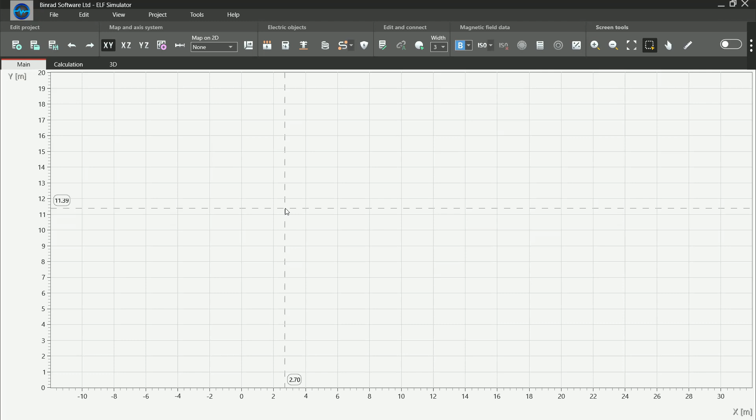To load a map, we press the Load Map button. Next, select the desired file, then OK. Usually, after a few seconds, the map is loaded.

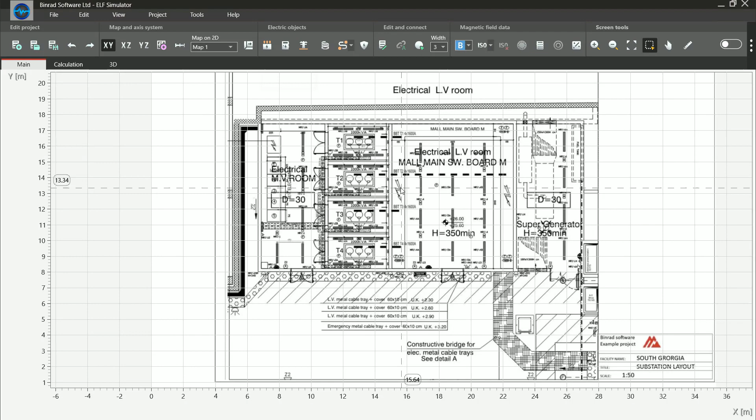As you can see, we can zoom and move it in 2 dimensions and in 3 dimensions. When zooming, you can see that the image is not that clear.

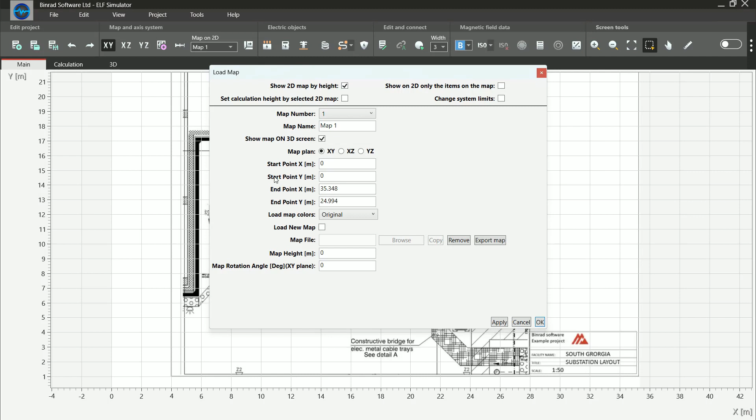To improve the appearance, we will load it again, but now with a higher DPI resolution. We select 150 for the DPI. In most cases, this will be enough. Don't use a higher DPI resolution unless it is needed, because it might slow the software down. Next, press OK.

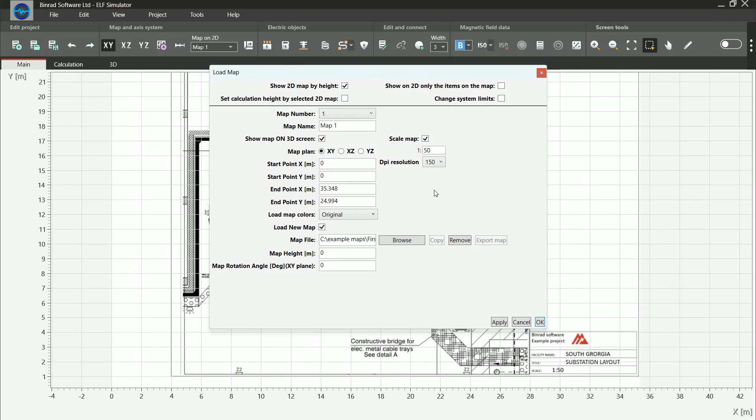Now it looks much better. Before continuing with the project, we must check that the map is calibrated. This check is done by using the software ruler to measure a segment for which the real length is known. This should be done for a vertical and horizontal segment.

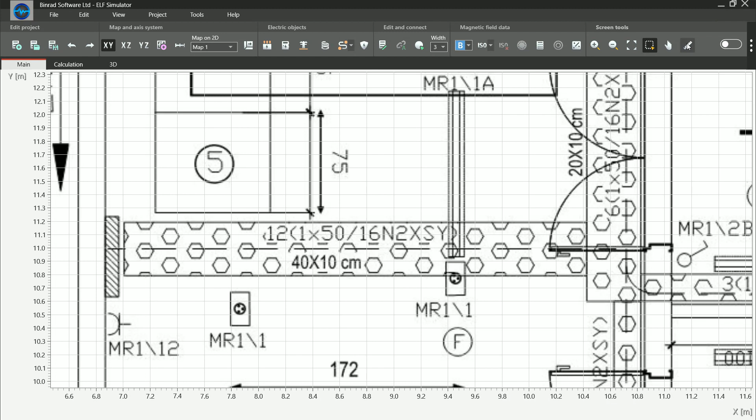We first check the vertical segment with a 75 centimeter length. The result is correct. For the second horizontal segment, the result is also fine. But this will not always be the case.

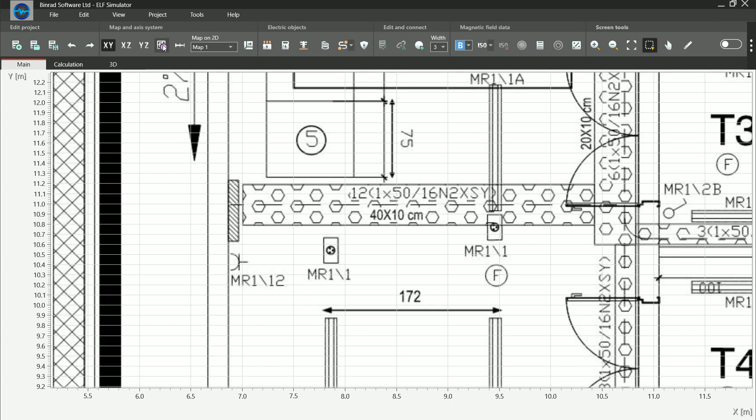To demonstrate how the calibration is done when needed, we will load the same map again, but this time with the wrong scale. We select the same file as before, but for the map scale, we choose 100 instead of 50. The DPI as before will be 150.

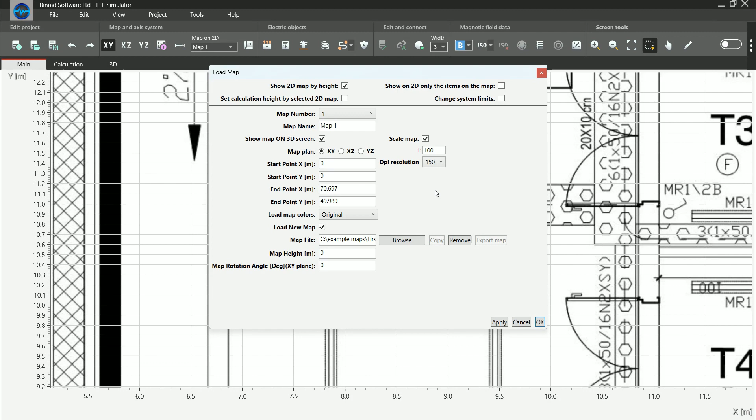As you can see, the real map scale is 1 to 50 and not 1 to 100 as we selected.

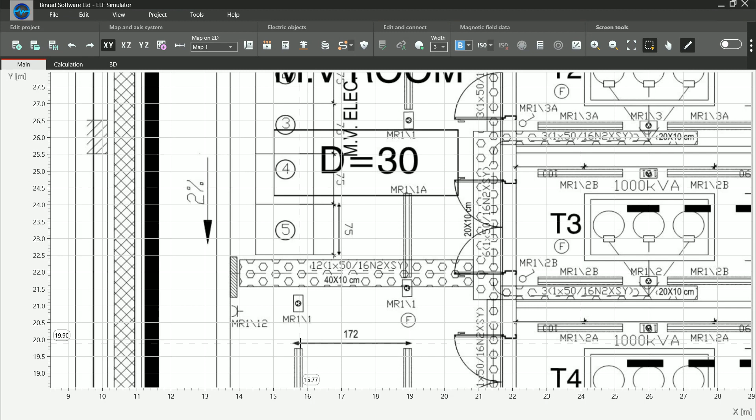We measure the 2 segments again. This time, their length is twice as long. As such, the map must be calibrated.

We press the Calibrate Map button. The default option is to calibrate by mouse. We will use this option. Now the real distance between the 2 points we are going to click should be entered.

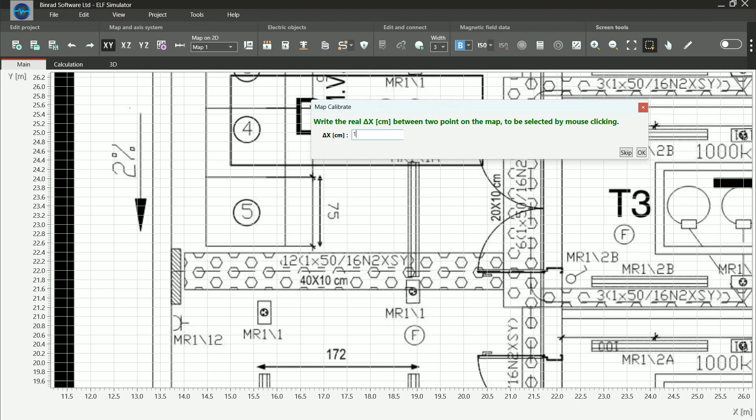Our horizontal segment's real length is 172. We now click at the 2 edges of the arrow. We need to do the same for the vertical segment with a 75 centimeter length. Again, click at the 2 edges of the arrow.

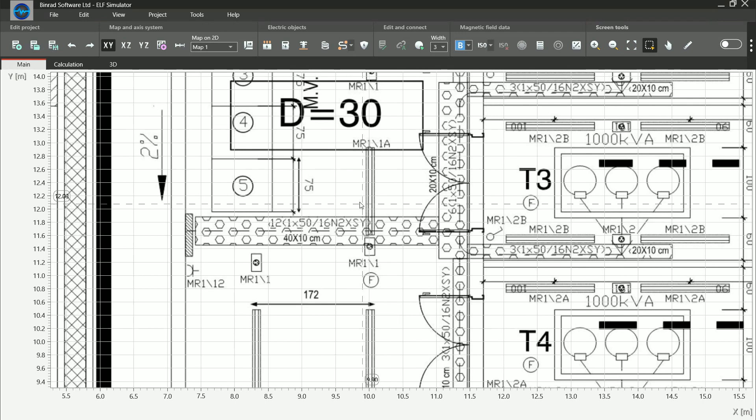Let's check if the map is calibrated now. The length is fine. The length is fine also for this segment. Therefore, the map is indeed calibrated.